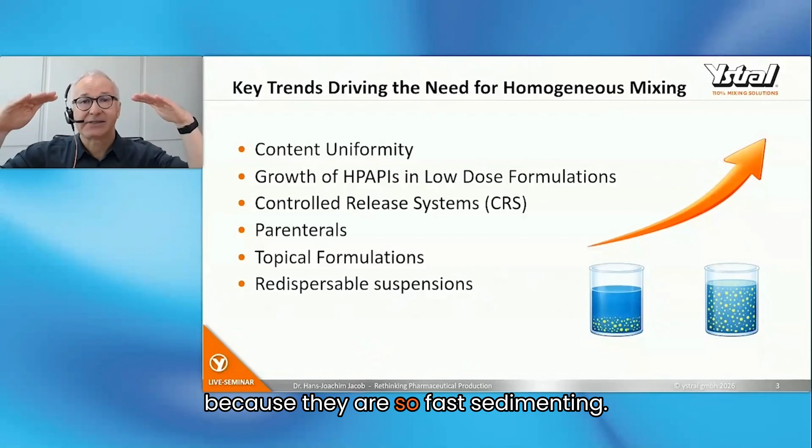We also have redispersible phases, products which you need to shake well before use because they are so unstable, they sediment so fast, like asthma sprays or something like this. These redispersible phases need an extremely good homogeneous mixture in the tank because they sediment so fast.

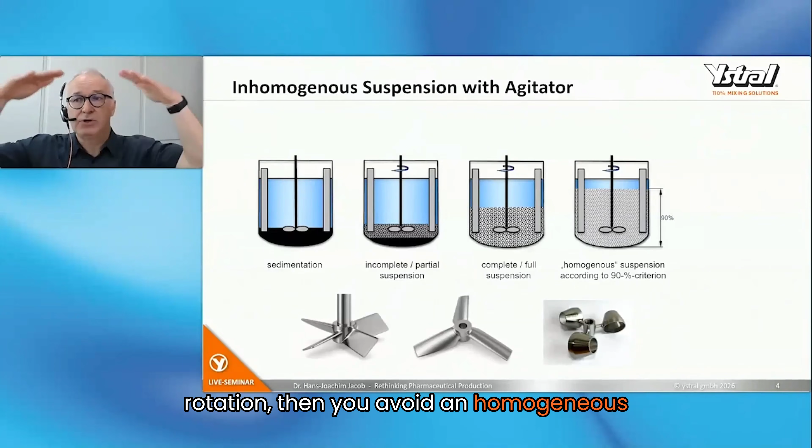Even with a hydrofoil impeller, above the impeller you have horizontal rotation. Below the impeller, it's okay, vertical movement. But above the impeller, you always have horizontal rotation. And when you have horizontal rotation, you prevent homogeneous distribution in the tank. You have different concentrations at different levels of the tank, and this cannot be avoided at all.

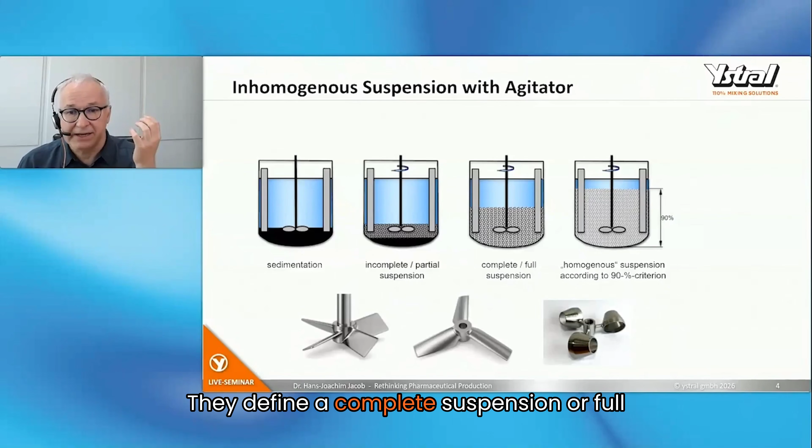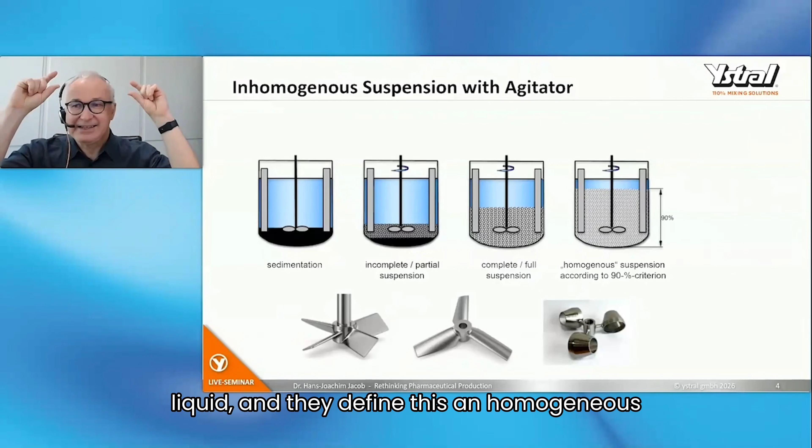They define complete suspension or full suspension as when everything is moving, but this has nothing to do with homogeneity. Since they are not able to reach homogeneity, they define a homogeneous suspension according to the 90% criterion, which means 90% is, so to say, mixed. The rest can be clear liquid, and they still call this a homogeneous suspension. There's nothing homogeneous about it, absolutely nothing.

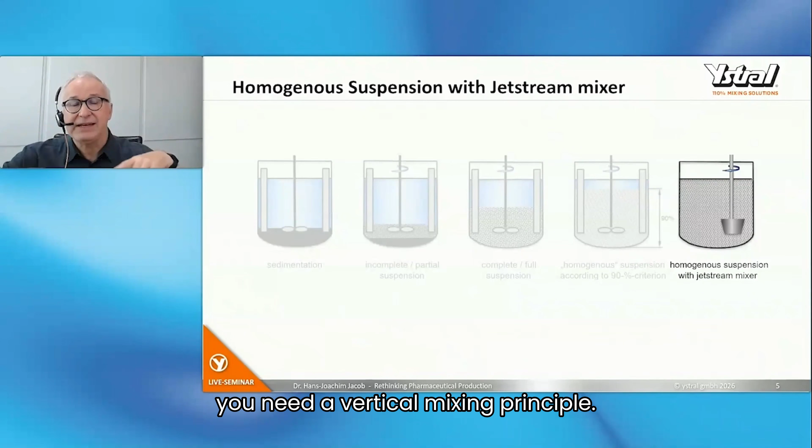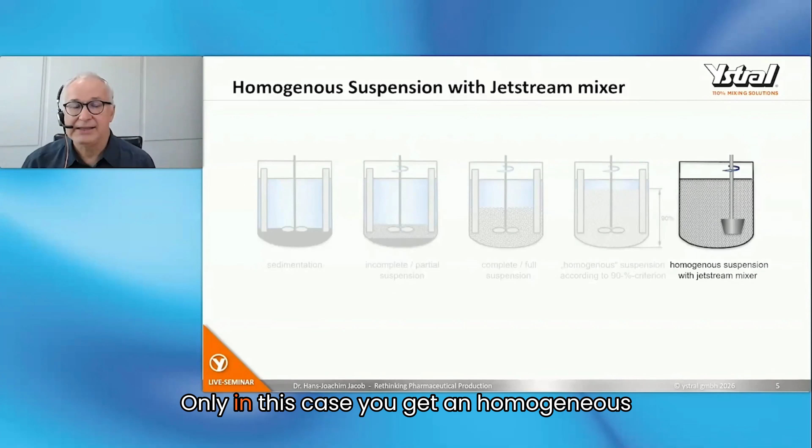If you need a really homogeneous suspension, you need a different type of mixer, a vertical mixing principle. Vertical mixing means from bottom to top: everything that sediments or moves at the bottom, viscosities or densities that are different, needs to be mixed vertically upward and recirculated. Only in this case do you get a homogeneous distribution in the tank.

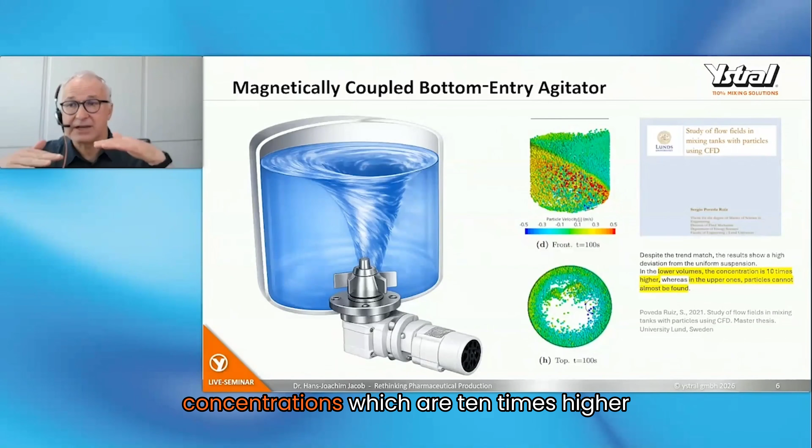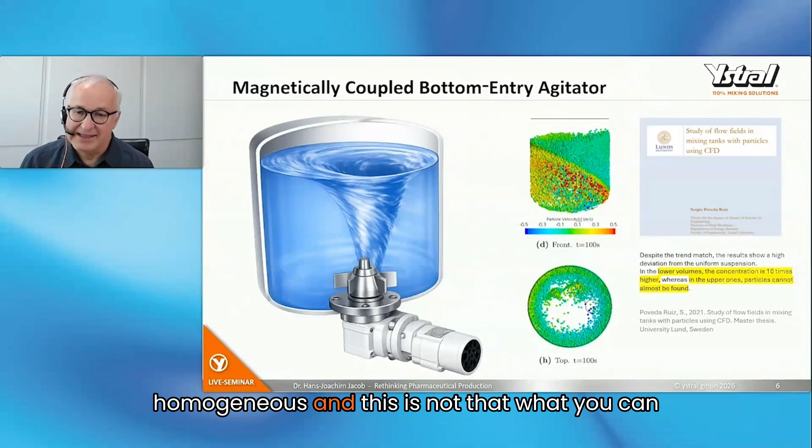As a result of this study, the conclusion is that in the lower volumes you have concentrations 10 times higher than the average concentration, and at the top of the tank, in the upper levels, you have nearly no particles at all. So this is anything but homogeneous, and this is not acceptable in pharmaceutical applications, whatever the application may be.

You need homogeneous mixing. The mixers that can do that are jet stream mixers. They create a stream directed at the bottom of the tank and recirculate the liquid in a vertical rotation direction. You don't need any baffles because there is no horizontal rotation in the tank. No baffles means easy to clean, absolutely easy to clean, perfect to clean.

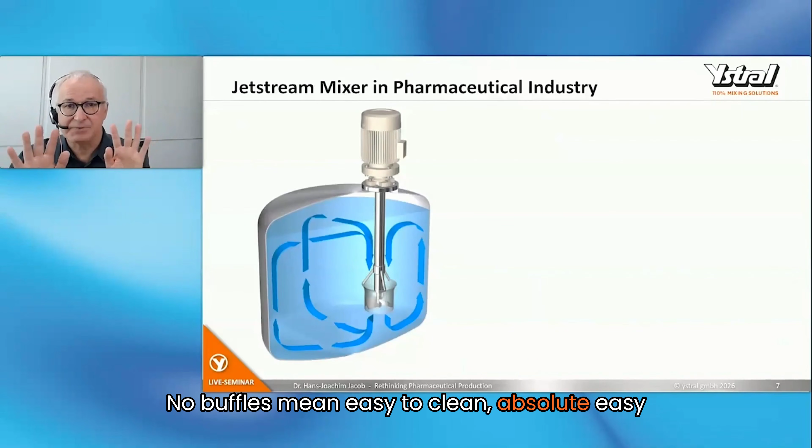And even if you have a cooling or heating jacket at the side, you get better heat or temperature exchange with the wall of the tank because the liquid is moving from bottom to top. If you only have horizontal rotation, as in a normal agitator, the hot area remains at the top and the cold area remains at the bottom, and you get no heat exchange.

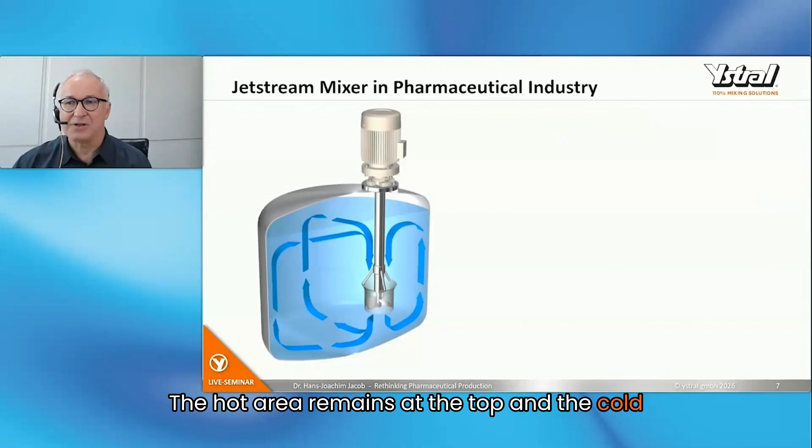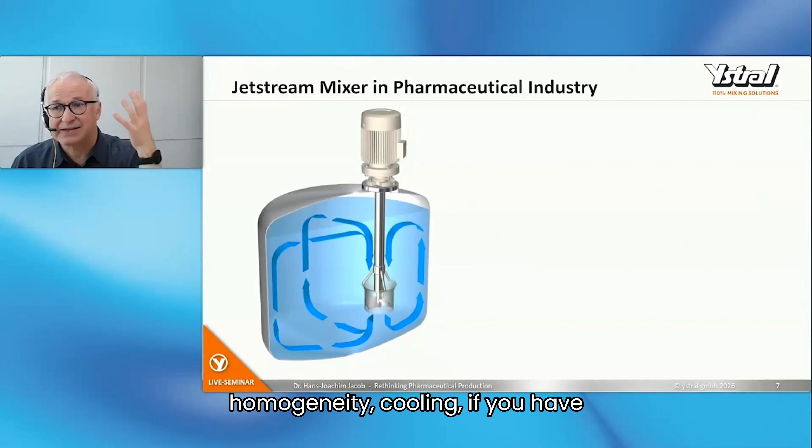So that means in all the typical mixing applications, Jetstream mixers have a much better effect on homogeneity, cooling, and crystallization processes, etc.

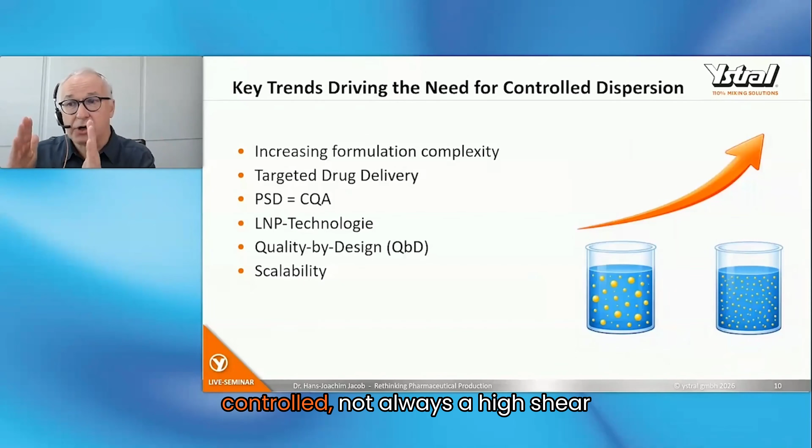My next topic is dispersion. Of course, there are also some very interesting key trends which require a controlled, not always high-shear, dispersion. The formulations are getting more and more complex, with emulsions, suspensions, nanoparticles. The problem is you must have a very precisely controlled process, because when you move to the next process step, you have no chance to correct failures from the previous step.

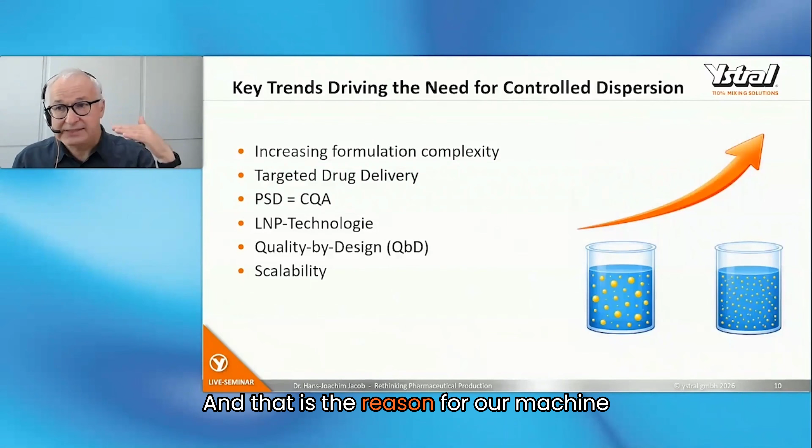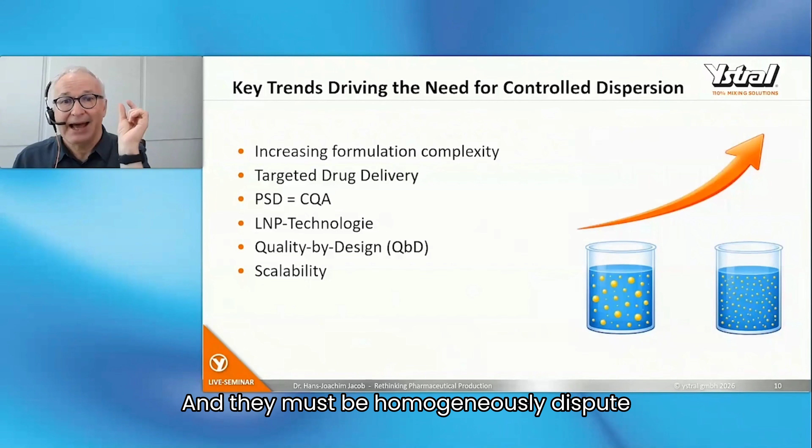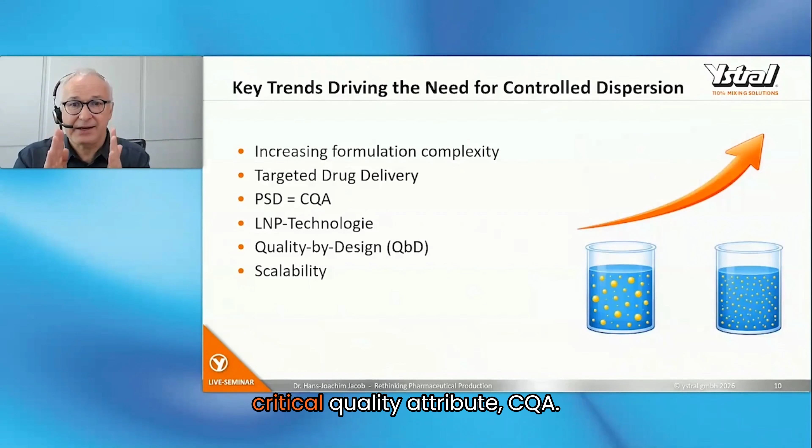For that reason, it is absolutely important that you have controlled dispersing conditions, and that is the reason for our machine designs. Today, we do not always need only small particle sizes. It's more important that we have narrow particle size distributions, homogeneously distributed in the tank with Jetstream mixers, but also very, very narrow, because particle size is a critical quality attribute, CQA.

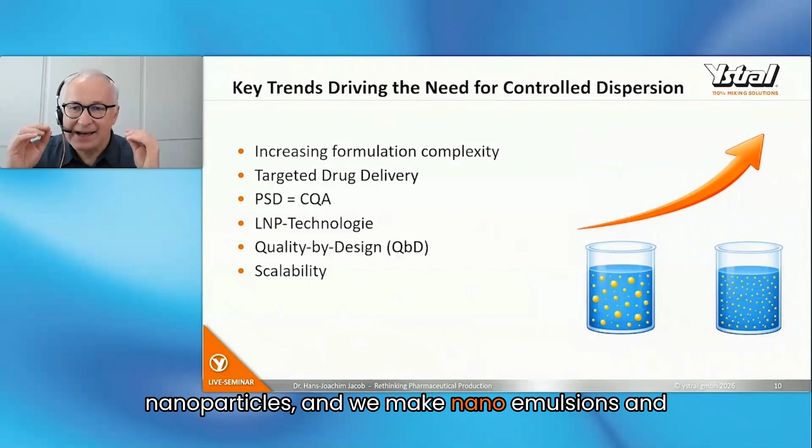So sometimes we have LNPs, lipid nanoparticles, and we make nano emulsions, and the critical requirement is an absolute uniform droplet size. Only this way you have a predictable pharmacokinetic development or use of your ingredients, and for that reason we need the best particle size distribution you can get.

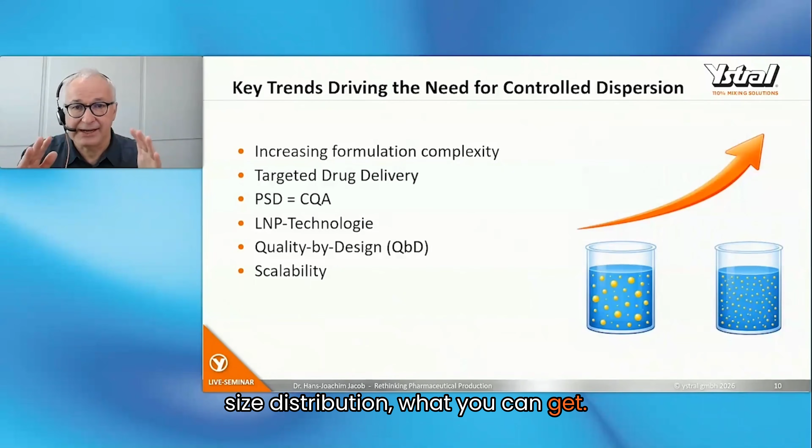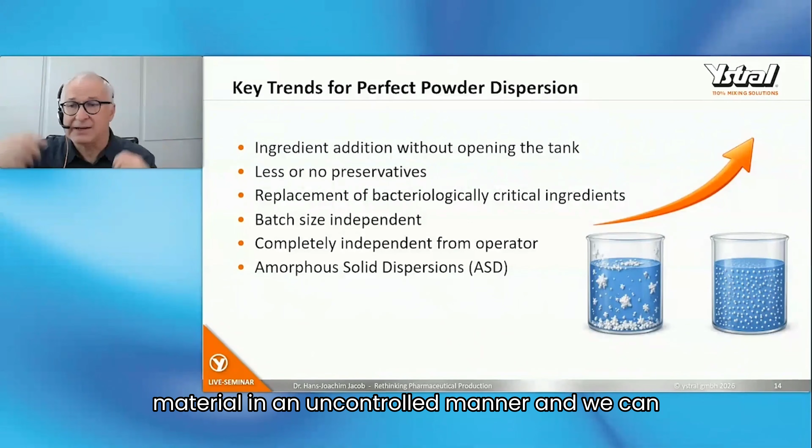One key trend today is we want to add powder materials without opening the tank. We want to add it into a closed process system without opening the tank, because when adding powders from the top, there is a risk with dust extraction systems that we lose material in an uncontrolled manner, creating dust or a critical atmosphere. All this can be avoided with our technology.

We are inducting the powders directly into the liquid, typically also in a recirculation loop. 100% of the powder goes into the liquid, nothing goes into a dust extraction system or a filter or whatever. Absolutely everything goes into the liquid, and we don't need to open the tank.

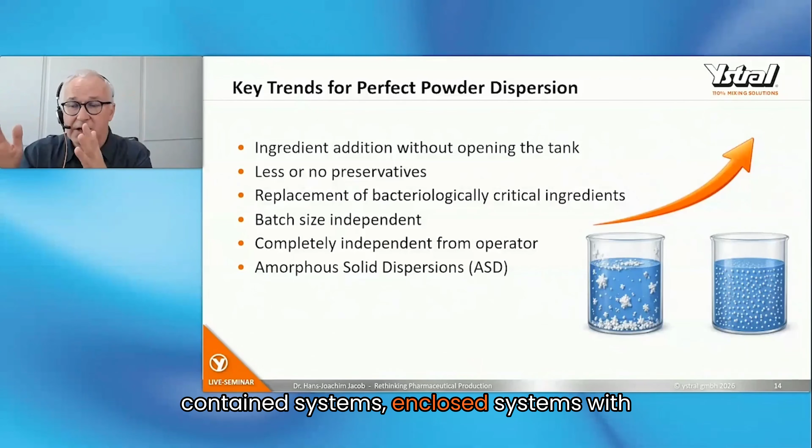This is not necessary. Another trend is you want to reduce the requirement of preservatives, or not use any preservatives at all. This can be reached when you have no contact with airborne germs, which happens when you open the tank or do open powder handling. We can induct powder from contained, enclosed systems with liquids, without any contact with airborne germs, under controlled conditions, and that is an enormous advantage.

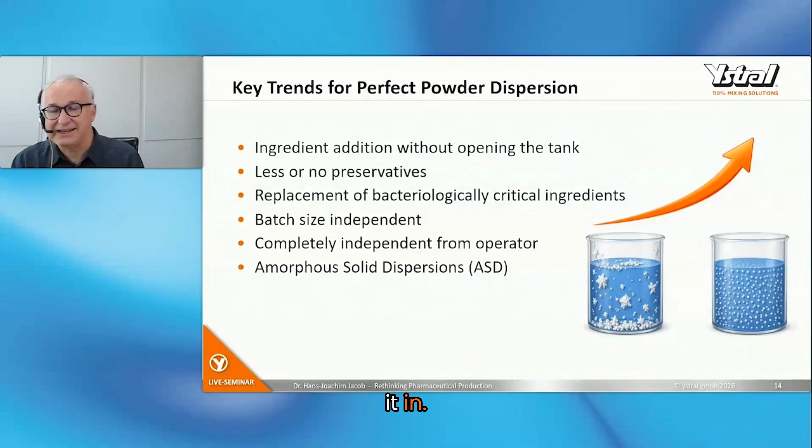Also, it's batch size independent, filling level independent, product independent. The process is always the same, controlled by the control system and completely independent from the operator. If one operator fills the powder a little bit faster or slower, it doesn't matter, because we are not inducting the material at the speed the operator fills it in. We are inducting it with our own conditions: opening angle, induction speed, rotation speed. So independent from the operator, always the same quality.

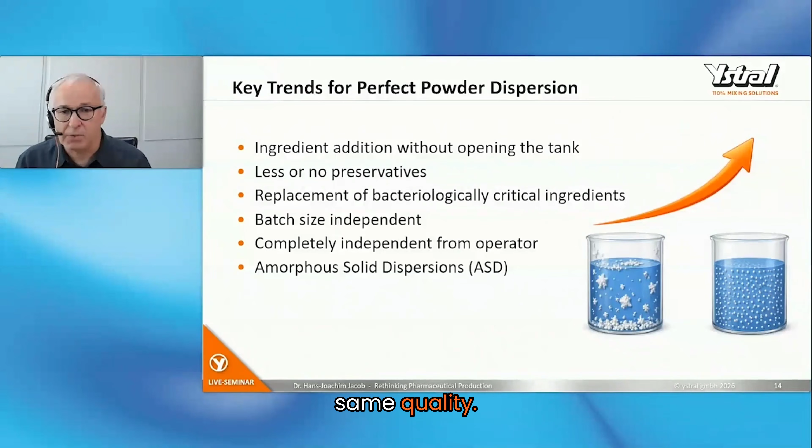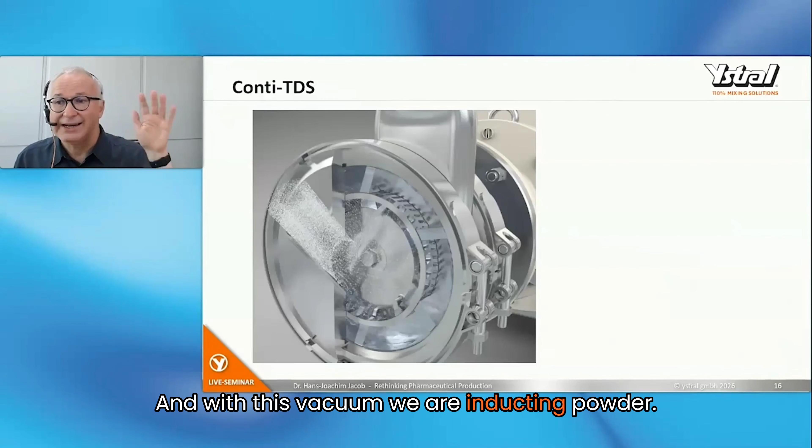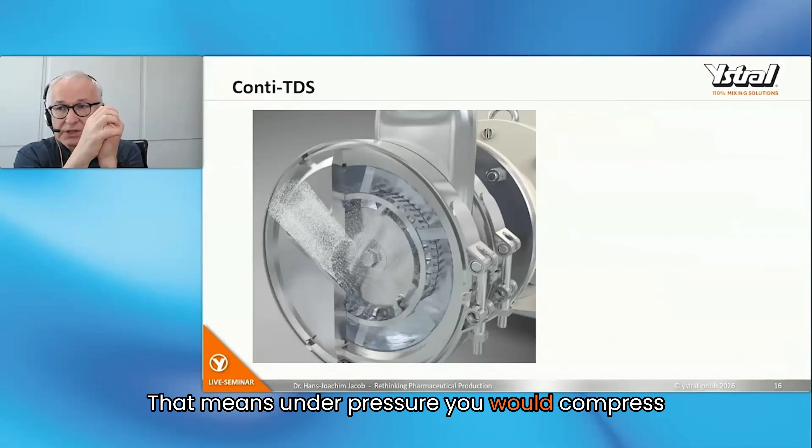It creates a very strong vacuum. It can go down to 30 millibar absolute, and if required, even lower. With this vacuum, we are inducting powder. Powder contains air - every powder contains air - and the air between the powder particles is expandable. Under pressure, you would compress it to a smaller volume. Under vacuum, it expands. If we have a vacuum in the range of 30 millibar absolute, the air expands 30 times its original volume.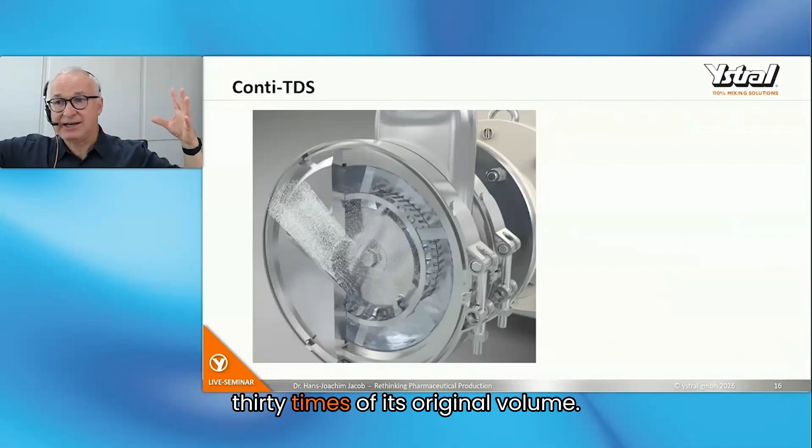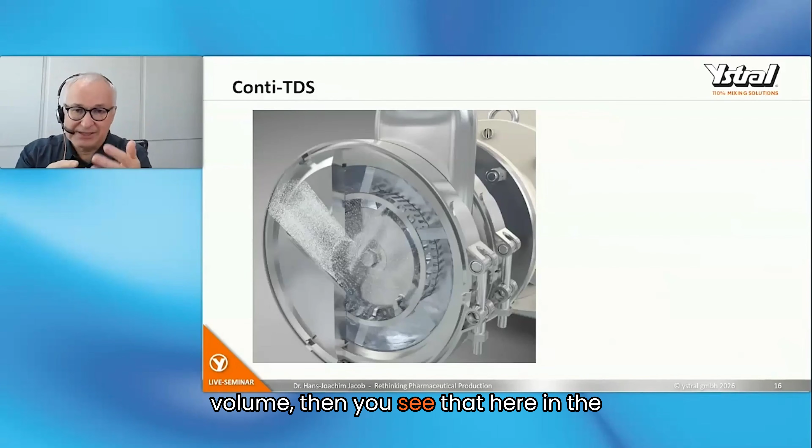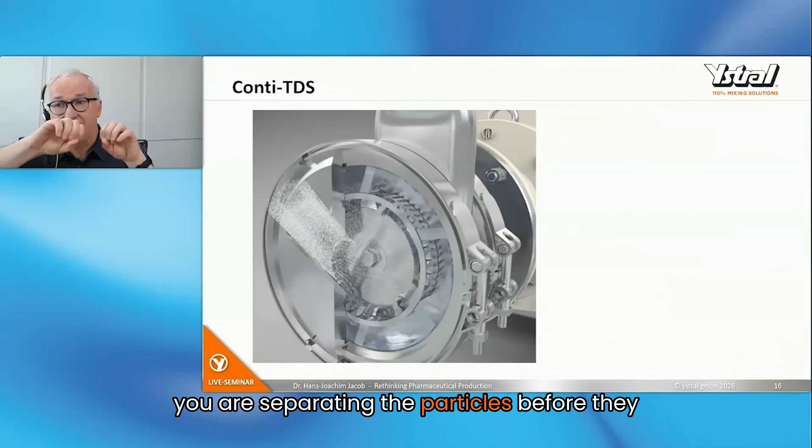What does this mean for a powder? The air is between the powder particles, and when the air expands 30 times in volume, you see in the picture that the powder comes in as a dense stream and gets more loose, and you get huge distances between the particles. This is reality - the air expands so enormously that you are separating the particles before they get into the dispersing zone. This happens only in a fast-moving powder.

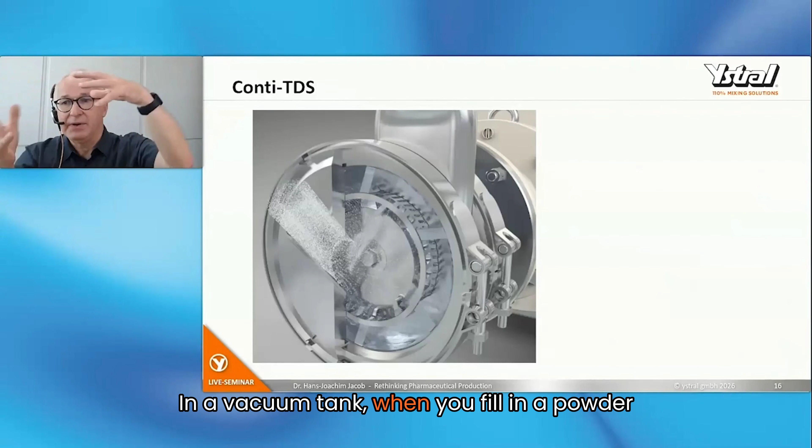Not in a vacuum tank, not at all. In a vacuum tank, when you fill in a powder amount and then apply vacuum, the air goes in all directions, but the powder particles are still touching each other. So this is a totally different story, and this is a problem when you are mixing in a process tank with vacuum powder into a liquid, because the powders get very compacted. So here it's the opposite.